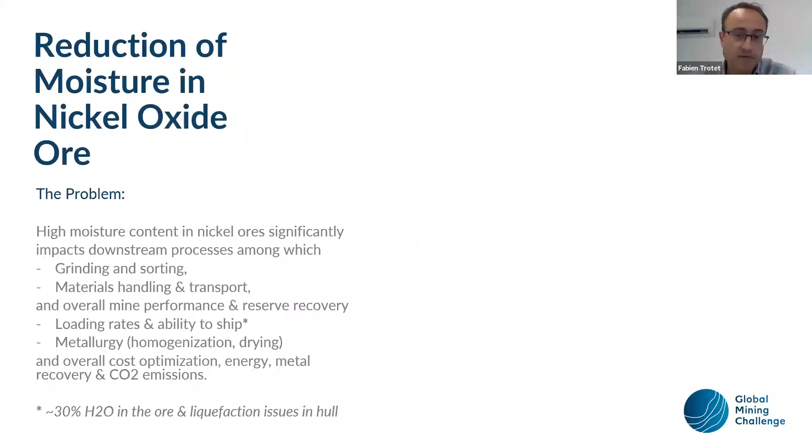The problem we have with the moisture content of the nickel is that, as you can see on some of the pictures we are presenting here, the moisture gives the ore sticky and clogging properties, which will impact all the downstream processes of the industry. It means not only the handling and transport of the ore, but also the performance of grinding and sorting, which consequently impacts the overall mine performance, and also quality, which impacts the ability to recover the reserve at the mine site, so the lifetime of the mine, and the operating costs.

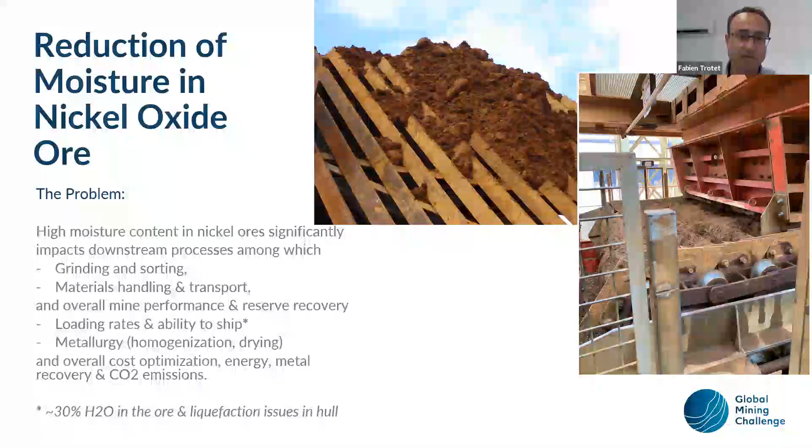Further down, we have impacts on the loading rates. Next illustration, please. So as we can see here, we can impact the ability to recover the ore. You can see on the picture on the right, but also all the sampling facilities. This is the upper left picture with that kind of clogging we currently have in the installation.

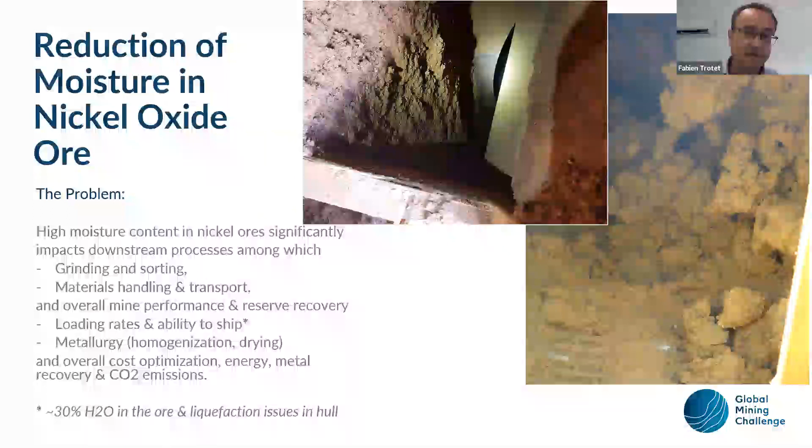Next illustration, please. Going down to the installation for loading the ore, we can see the sticky and high moisture aspect of the ore. On the right picture, you can see the liquefaction we sometimes have on sites, which raises probably the biggest risk in terms of ability to ship the ore, with problems like liquefaction in the hull, which has dramatic consequences, as you may know.

Then further down, going to the metallurgy aspects, the ore coming at the plant, we have issues with homogenization and drying, so it impacts not only the performance of the process but the overall cost. I would say the energy necessary to go through the steps of the process, but also not only energy itself, but also the CO2 emissions.

And regarding all the aspects we're facing with the global change in terms of climate, all those problems we have are going to be increased. So we need to face those problems, and that's the purpose of the challenge. Going to the next slide, please.

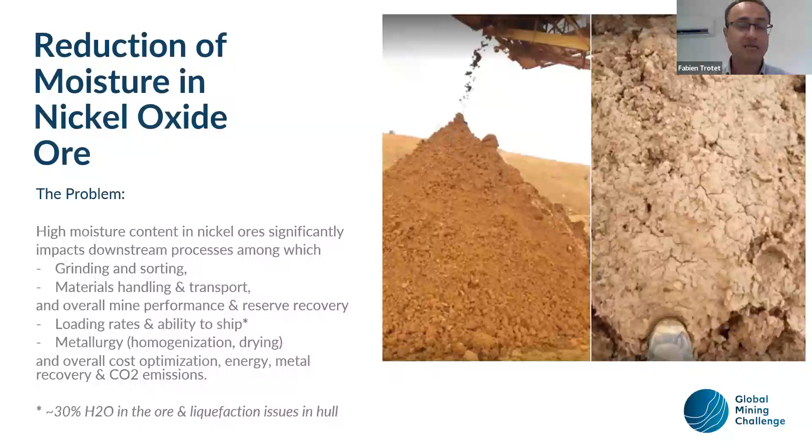Then we go on layer stockpiling, and depending on mine sites, we use either tarp or roof solutions in order to prevent additional moisture coming back from rains in tropical conditions. More recently, we also worked on polymers, but anyway, all of those solutions we emphasize here only contribute to limit additional moisture in the ore, but not effectively reduce the moisture content of the ore.

So regarding all the operating costs we have for those kinds of trials, the question is how to deal further, not only in preventing the moisture increase, but also going further to a decrease of the moisture content of the ore, and what kind of technology we can have to face this challenge.

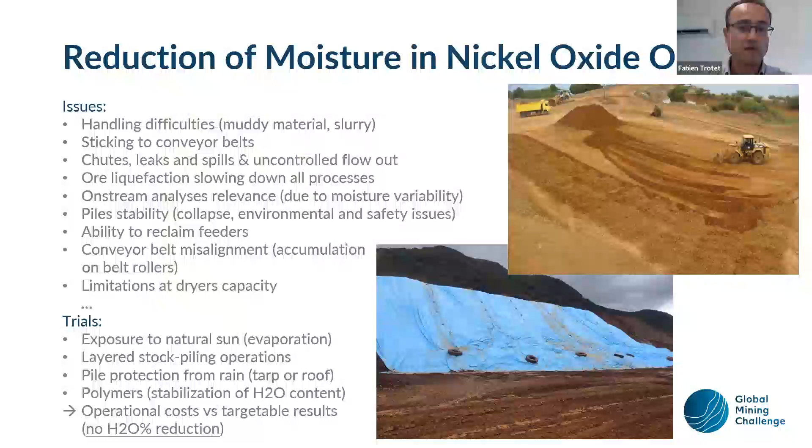Into the next and last slide, please. So the solution we are seeking in terms of support is to reduce the water content and the moisture of the ore. We are seeking a range of solutions that can be more or less a combo of different solutions, depending on their own effectiveness, the performance, and the constraints of operating in industrial conditions. We are open to a range of solutions that could help to reduce, step by step, the moisture from 1 to 5%, or 5 to 10%, or greater than 10%, depending on the solution you can propose for these targets.

Among the requirements, we would like the solution to have a positive energy balance compared to what we operate at the moment. And we must focus on energy supply that would come from renewables for that kind of solution.

Also, at this step, we focus on solutions that would be implementable at the mine site. We don't want the solution to be implemented at the plant, in terms of metallurgy, I mean. So it's mostly the mine site operations, the mine site itself, or the site with the loading installation. And we need the solution to be respectful of the mineralogy of the ore. That means we don't want to move toward calcination, which would be more a pre-metallurgical part of the process. So the solution we are seeking should be respectful of the mineralogy of the ore, which is also critical for the clients that our members have down the process.

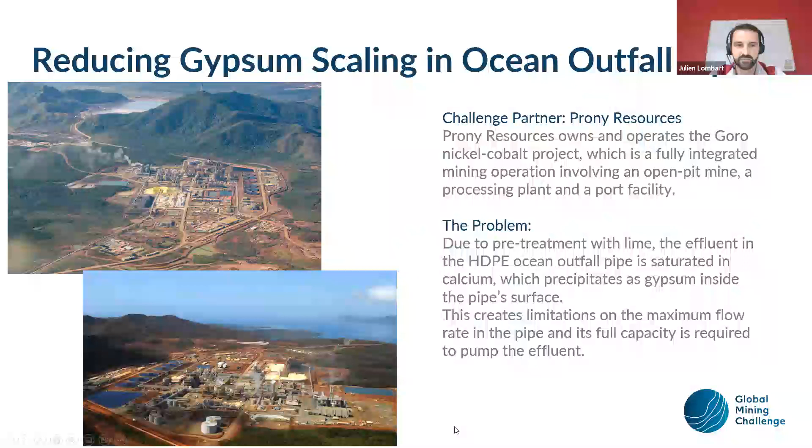So as I said, two kinds of solutions are expected. The first one is avoiding the precipitation on the pipe. And the second one is a method to descale. So it can be a mechanical method or other.

But we have a big constraint at this point, because it's a very delicate topic. As we send this effluent to the ocean, we really need to be very careful about what we do with it. If we want, for example, to add some products to avoid precipitation or to remove the scale, we really need to be sure that this product is okay to release into the environment. That's why that will be the most difficult part, I think, of this challenge. It's just to be sure that we keep the right to send this effluent to the ocean.

So as I said about the solution, we really need for sure to keep the safety around this operation. It's normal, we have to keep the effluent quality. We need to stay within the limits that we currently have in terms of the different elements in the solution. If we add a new element to the effluent, we really need to be sure that it's okay to release it in the ocean. And if it's a mechanical thing, there will be, I guess, costs. As we know, the current world situation is complicated and all the costs are very high, so we need to be careful about the cost also.

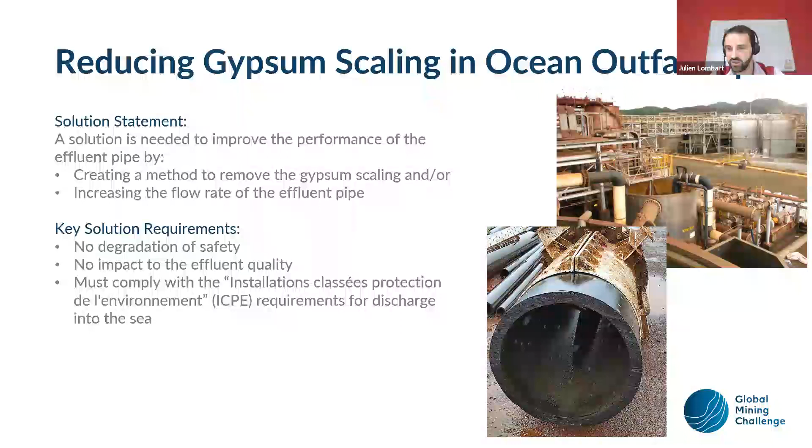So I think I'm done with this topic. Maybe we can go to the next one.

Yes, perfect, please. So the second topic is also about scaling, but this time it's more about scaling of hematite and alunite. As I said during the introduction, we have a process of HPAL where we feed the ore slurry into the HPAL autoclave. We add the sulfuric acid to do the leaching. During this process, we have precipitation of hematite—the iron precipitates as hematite, and the alumina precipitates as alunite—in the autoclave. The most important part of this precipitation stays in the solution as a slurry and leaves the autoclave at the end of the HPAL process.

So the issue is, I think, clear enough. But when you have precipitation on the shaft and on the agitator, you decrease your efficiency of agitation. And when you precipitate on the walls, you decrease the residence time in the autoclave, and you can create plugging. As we have 6 compartments in the autoclave, and we go from one to another by overflowing, if you have too much scale, you can have issues of plugging.

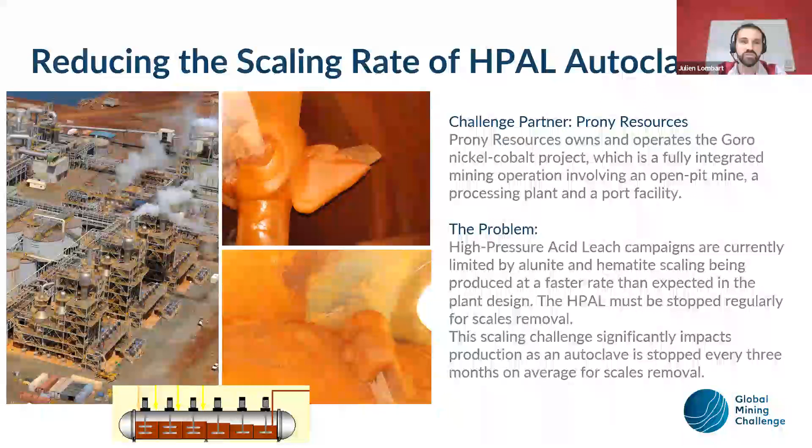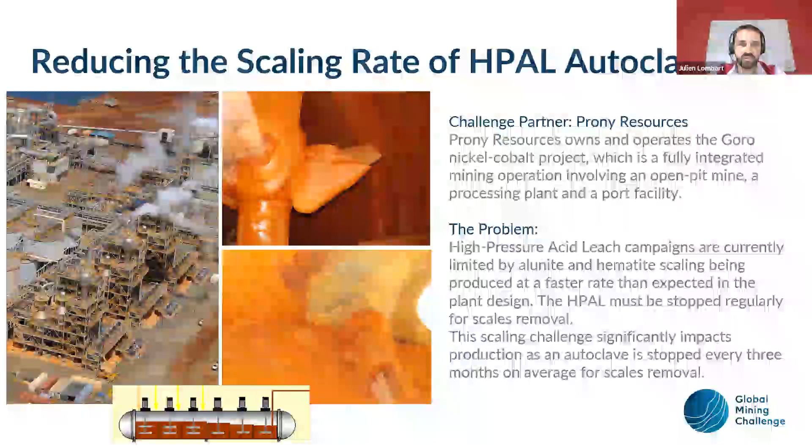The other part is if we have a solution to finally reduce the scaling rate, or maybe spread the scaling in the autoclave across the other compartments, that would be very interesting. Can we go to the next slide, please?

So here you have some examples of the crust that we have in the autoclave. That's hematite and alunite, as I said. So it's a really hard crust, very hard scales that we have. We need to remove it by water pressure. It's high pressure, and it's very hard to remove. But finally, if we can just reduce the thickness of these scales, or just again be able to measure it during the operation, that will be a very good option, a very good solution.

Due to the extreme conditions in the autoclave, we haven't found a way to measure the thickness yet, but that's why we are here, hoping that you will have a solution for that.

So of course, we don't want to decrease the HPAL performance and recovery. So we can't reduce, for example, the acid injection or acid dosage, just to be sure that we don't precipitate the hematite or things like this. We need to keep the same performance in the autoclave. We can't do very big changes like changing the acid, the type of acid, or this kind of thing.

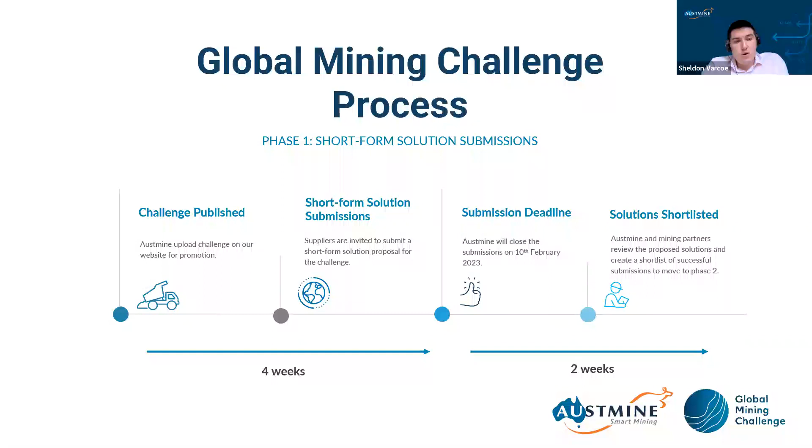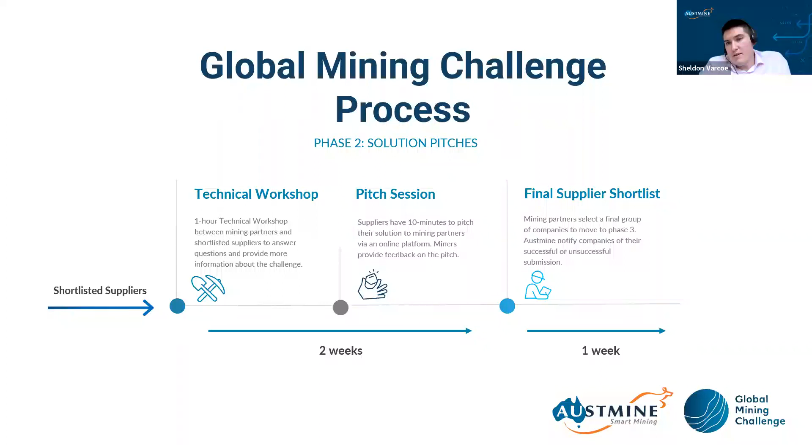Now, how many companies really depends on how many submissions and the quality of submissions that we receive. It could be a handful, it could be 10 to 15. It just depends on what we receive from the challenge.

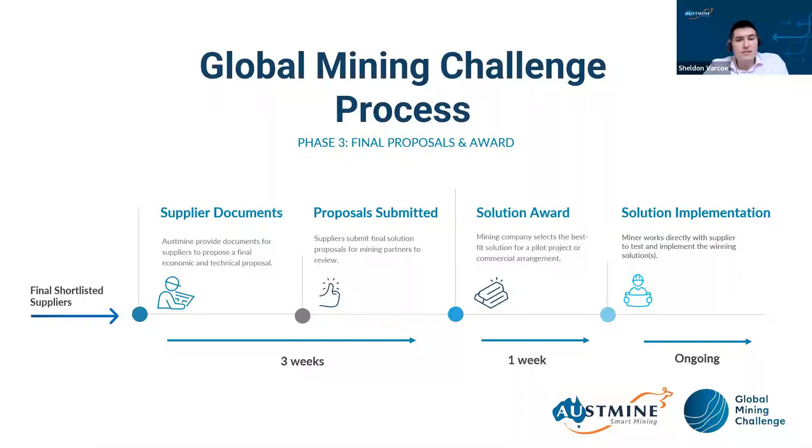The subsequent phases are then expected to take place throughout February and March. But please note that timelines do sometimes vary depending on the responses we receive and also the bandwidth of our partners with the challenges. So with that in mind, I hope that clarifies the process.